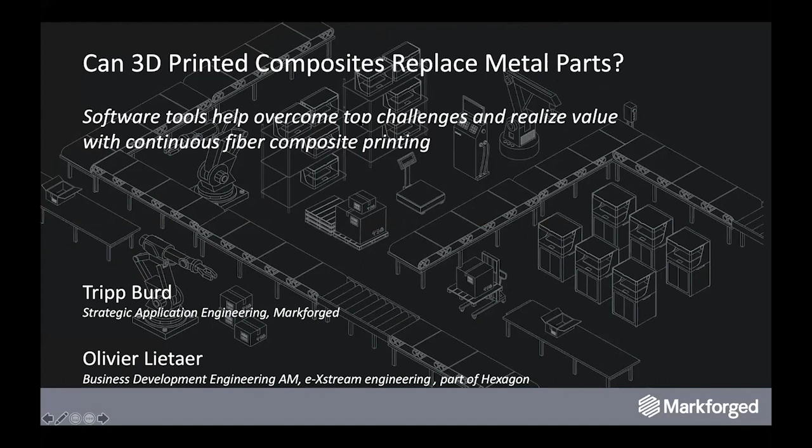All right, thank you. So while we launch into this, a quick background about Markforged. Markforged has been around for half a dozen years and is a growing industry leader in the world of industrial 3D printing. We produce an ecosystem of hardware, software, and materials designed to work seamlessly together to allow engineers to quickly and easily produce functional and accurate parts that can be ready to use straight off the machine.

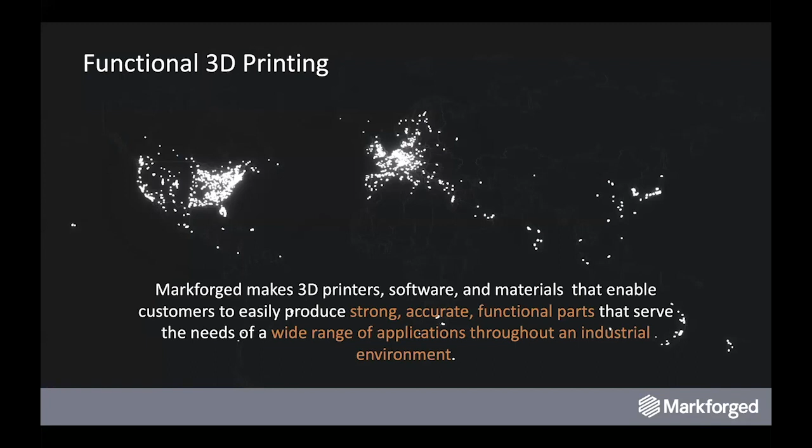Growing globally, we've got tens of thousands of machines scaled around the world, all managed by unique cloud software tools called Eiger that allow for up-to-the-minute connectivity with fleets distributed regionally, enabling virtual inventory management and distributed printing as necessary. Our current portfolio stack looks something like this, with a range of industrial 3D printers differentiated primarily by the ability to 3D print continuous filaments or continuous fibers.

This differs in functionality and performance from most fiber-filled 3D printing materials, where traditionally you have a base plastic mixed with a short length chopped fiber that dramatically increases the strength and dimensional accuracy of a component. However, it's still limited by the short chop length of the fiber.

Markforged pioneered the invention of continuous printing, where a print head extrudes a second material mixed with a complementary binder that allows it to print fully structural, fully strong parts that in many cases can exceed the strength of aluminum due to the properties of continuous strength fiber.

This allows functional parts straight off the machine, coupled with an enterprise software solution that allows for easy management of builds, different reinforcement strategies, as well as print fleet management across the entire ecosystem within your installation, with multiple users collaborating together to provide functional parts around the world.

All this is coupled with a range of engineering materials to provide functional strength. In the composites world, we've got materials for higher strength, flame resistance, and different surface properties, coupled with the ability to print continuous fibers such as Kevlar, fiberglass, or carbon fiber, allowing you to really tailor the performance of a part for a specific application.

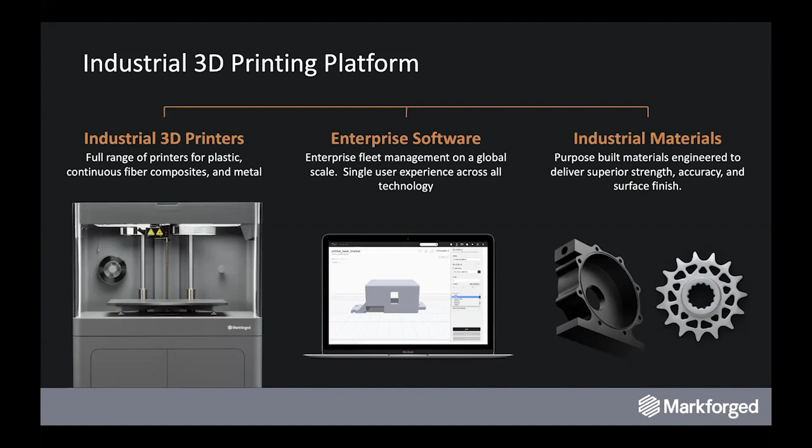In the world of 3D printing, obviously prototyping is extraordinarily popular and extraordinarily high value compared to traditional methods. This is where the fast delivery time and the ability to mock up and iterate development very quickly allows for faster time to market and improved product design and functionality all around.

But if you look at the overall revenue of the Fortune 500 manufacturing companies, the actual spend in the prototyping world is pennies compared to their overall core competency. So the addressable opportunity is a bit limited compared to their core business.

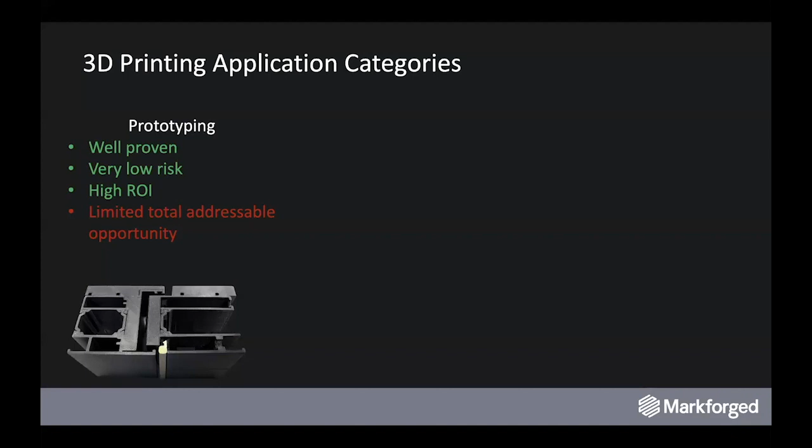Now, growing rapidly in part through the adoption of Markforged tooling, which is becoming extraordinarily popular. This opens up a much wider scope of addressable opportunity compared to the overall bottom line of a business, and still has extraordinarily high ROI due to the low part counts, complexity, and low production volumes necessary for specific part tooling. It does, however, move a little bit more up the risk chain where you've got part-touching details.

You've got things that are impacting the quality of a part that a customer might see. So as far as the de-risking that's necessary to push this into more high-value applications, sometimes other steps are necessary. And finally, the ideal end state is the ability to 3D print end parts.

This unfortunately has seen limited implementation. However, it's growing rapidly. Some of the areas of advancement are focusing on the geometric complexity allowed by additive, or the ability to drastically streamline supply chains by being able to design centrally, send files around the world, and then print locally on demand.

This is greatly reducing carrying costs in warehouses, where one part on the shelf and an infinite number in a virtual library allows for on-demand replacement, but then the ability to restock without having to rely on global shipping times or third-party vendors.

So the ROI here is huge. However, the comparison against traditional methods, the cost per part compared to injection molding or something, is not valid today. However, the other benefits in the worlds of logistics optimization certainly drive more value. The risk here is quite high, though.

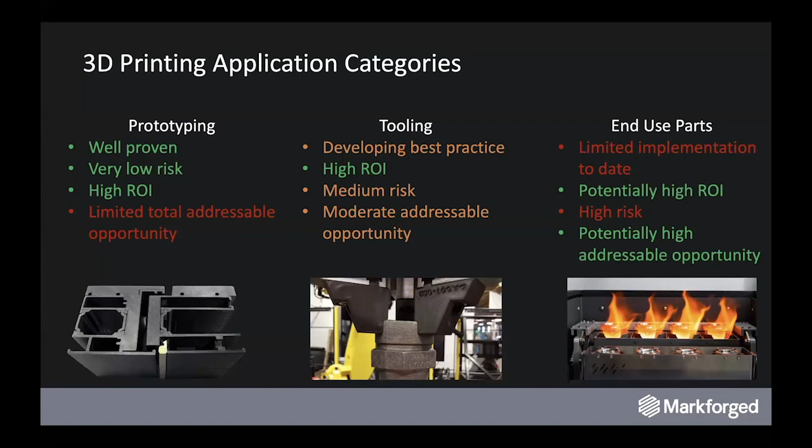So what we want to talk about today is how do we de-risk some of these things that allow the unlocking of more addressable opportunity for these customers.

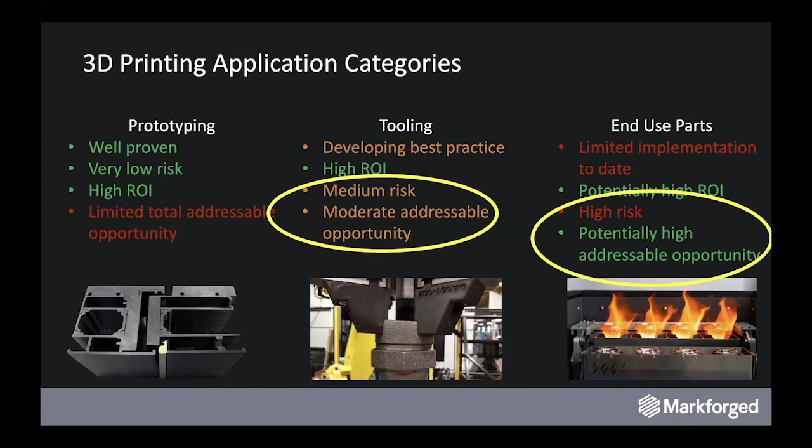So with the complex amount of variables involved in the printing process, we've got fiber choices, we've got laminate schedules, we've got the environment around the printer, material choices for the base plastics, the design. There's a lot of things that are changing. However, ROI, the financial drivers behind making these parts, predictability and repeatability become core as we start to push these functional components into higher-risk areas.

Software is becoming an extraordinarily powerful tool to help manage these variables and begin to predict the performance of these parts before they hit these critical applications.

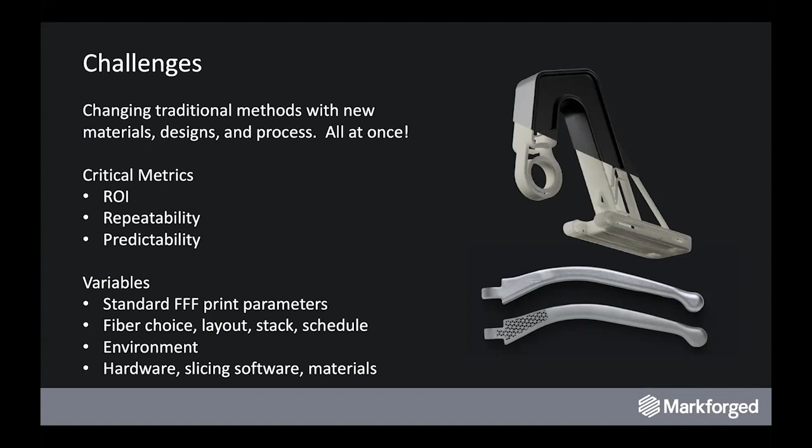So by driving the ability to print carbon fiber in these functional applications, this continues to unlock more value for our customers.

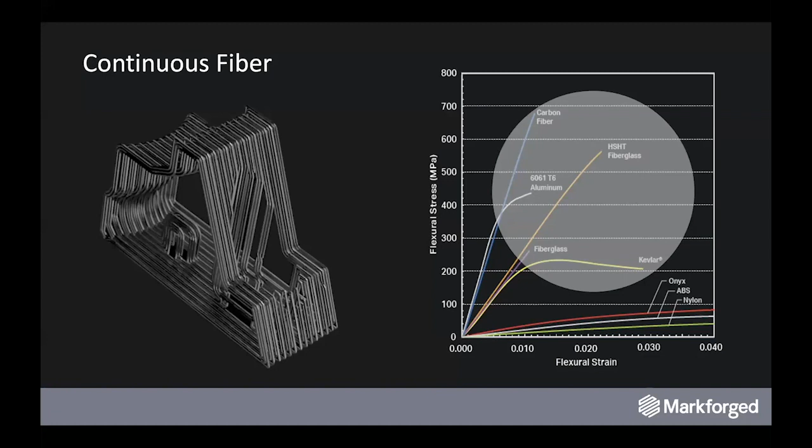Which brings us to Danfoss. So Danfoss is a worldwide industrial manufacturer. They make a wide variety of components for different machine centers and different applications.

However, working with Danfoss Power Solutions in the US, we've developed a great relationship. They're popular Markforged users in the world of tooling and fixturing. However, in their business, they have a high mix of relatively low-volume castings and housings for all of these pumps and things that go throughout their process.

They very much like to use Markforged in all of these areas to improve tooling in their part creation stream. The challenge is that much of this tooling is lift assist. You're lifting these heavy cast metal components and moving them from machine center to machine center for different drilling and milling operations as they go down the line.

These lifting applications are higher value than a standard drilling fixture or nest or something. However, now that we've got lifted metal, worker safety becomes critical.

With their application for 3D printing, they found that it meets the technical requirements and financial metrics for a lot of typical shop floor things. However, the areas where they'd really like to apply this technology are limited by risk. They've been limited in their ability to adopt additive in other areas of their business due to the extensive testing or validation required to print a prototype, destructively test it to ensure it meets load, then roll it out for one production application. When dealing with a very high mix of parts, that becomes costly and drawn out on the timeline, so the benefits of additive are eroded away.

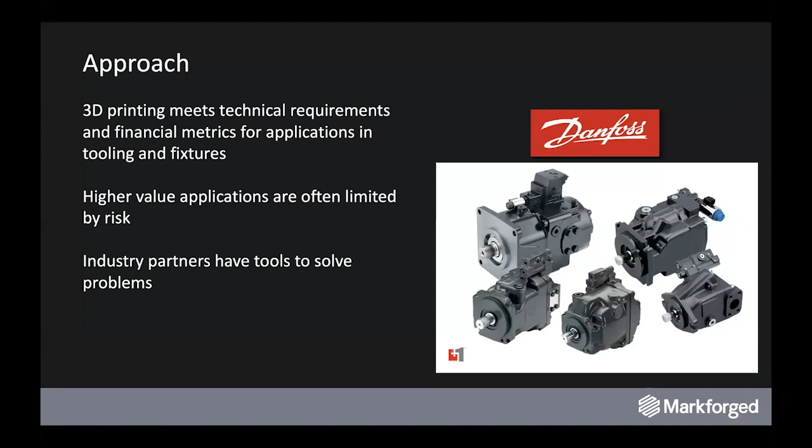This is where Danfoss, being a joint customer of both Markforged and MSC, drove a relationship here, identifying industry partners with the tools necessary to solve this problem. The challenge was to validate, using software tools, the performance of 3D printed composite parts to ensure they could meet the safety and repeatability requirements necessary to replace much of their machined aluminum tooling on the factory floor. By de-risking this application, they were able to apply it in areas that had otherwise been prohibitive. It allows for increased safety, new designs for ergonomics or lighter weight, and still delivers all the benefits additive typically provides, such as time to market, faster iteration, and no external PO process or waiting for external sources.

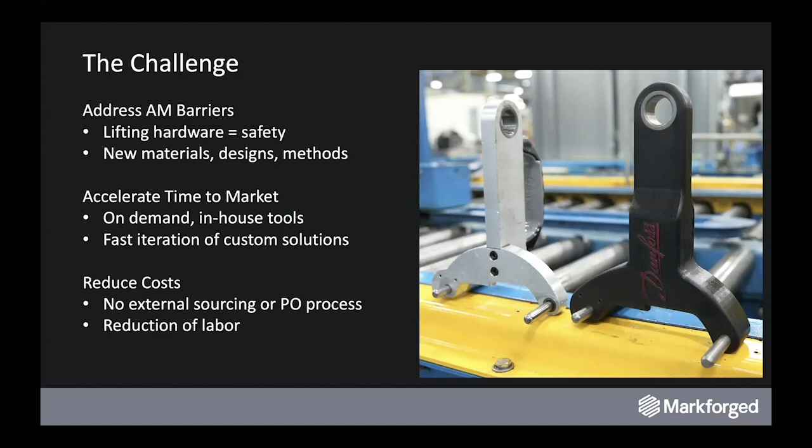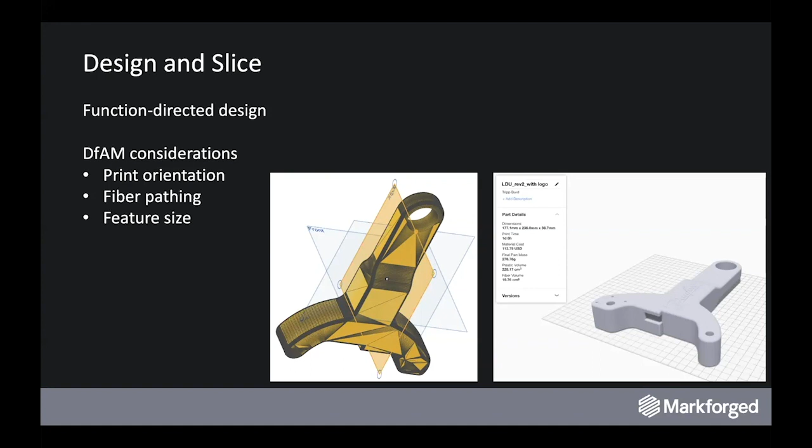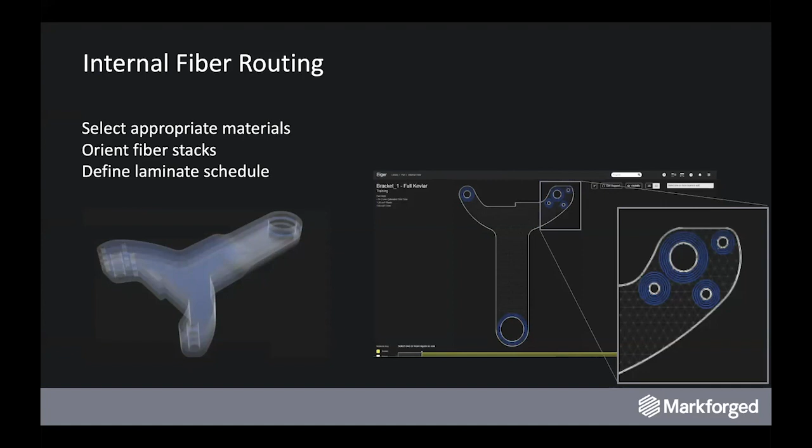Looking internally here, and I'll go through the Eiger view in a second to do it live, you can see that while you've sliced your part for 3D printing in Markforged, you then have the ability to go in and reinforce internal features with particular laminates to strengthen certain areas or provide robustness for different loading conditions. So we'll go in and show how this works. Give me a minute.

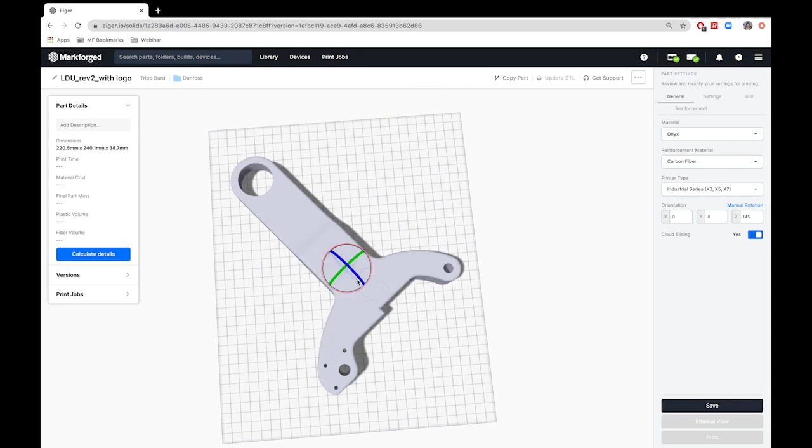Eiger is our software, typically cloud-based. Most of our users are comfortable with that, now being ISO 27001 certified. Our customer IP is extraordinarily important to us, along with their security with their existing libraries.

So this is the workflow in Eiger. The part is imported, and you have the ability to orient it as necessary. It'll snap to certain features to present the best way to print.

In here with our printers, you have the ability to select not only the base material, so I can choose anything in the Markforged ecosystem. So Onyx, which is our short chopped fiber reinforced modified nylon 6, or I can choose any other material in the Markforged ecosystem, Onyx FR if this is a flame resistant application, or even the tool steels if you wanted to transition this to the Metal X rather than the industrial series. Then on the fiber side, the ability to print Kevlar, carbon fiber, high temp, high strength fiberglass, all of these things that can be chosen for different properties desired of the part.

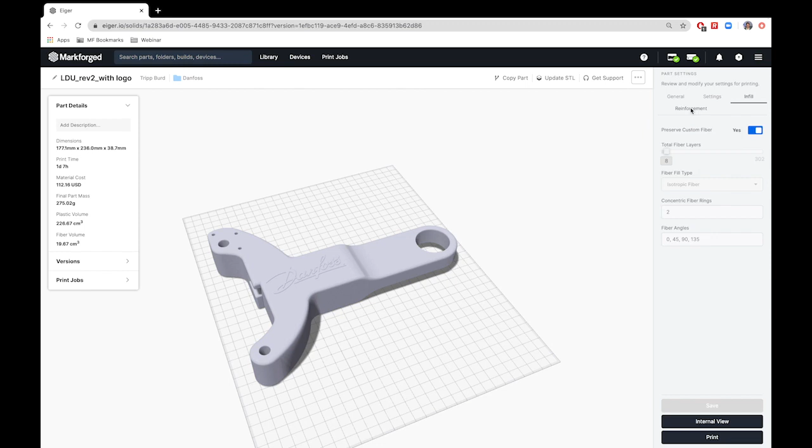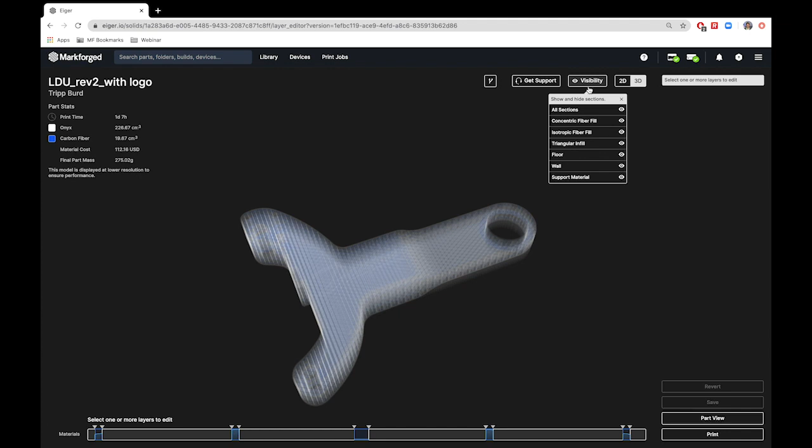Once the global settings are determined, the ability to go in and do the actual composites engineering is possible. In the internal view, you can get a 3D fly-through version of the internals of the part. So rendered here, you can see we've got 5 laminate schedules, or laminate stacks of fiber, where we're reinforcing the outer planes. We're running concentric fiber between the load-bearing top ring and the pins at the bottom of the component that actually nest against the metal casting.

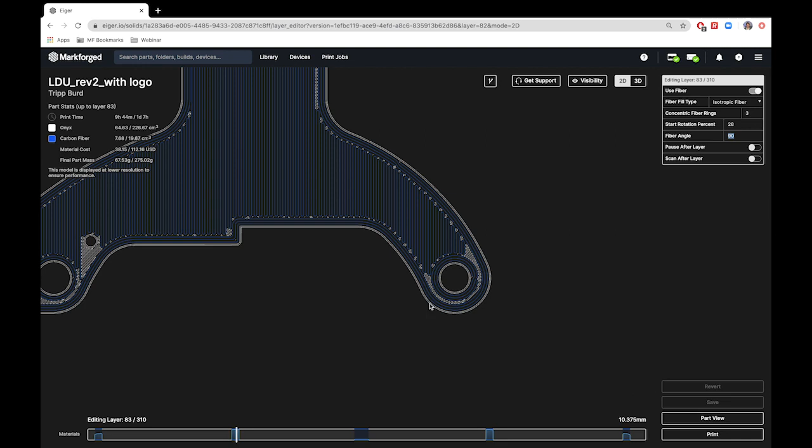Going in layer by layer, you can actually engineer the performance of your part to produce certain properties. In this case, we have concentric fiber routing around the lifting ring and running all the way down the pins that connect the load to the bottom piece, allowing for any sort of laminate schedule you need.

You can go in and change fiber orientation, fiber rotation, things like that that are necessary to improve properties in certain bias—so a 90-degree fiber, and then an isotropic laminate stack that helps give strength in all dimensions.

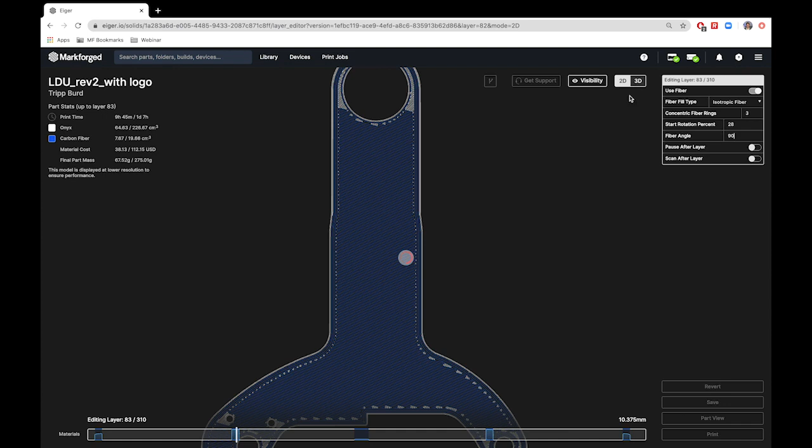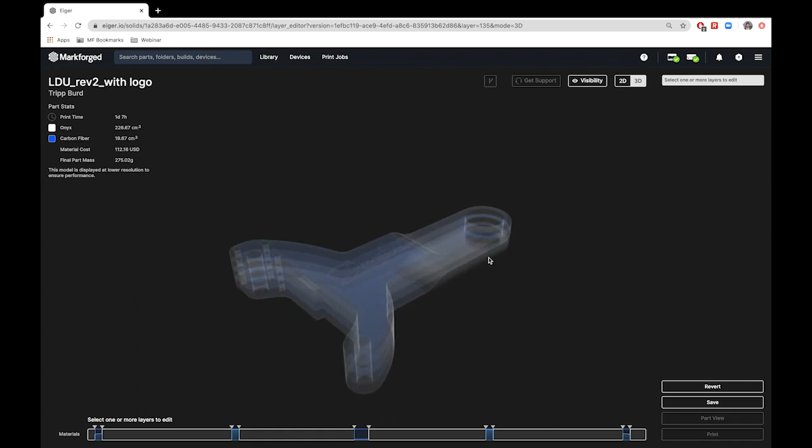Then down here, the ability to reinforce through holes for strength, preventing any kind of point load through the walls of the part. For areas that don't require reinforcement, you can run just our base plastics material in a honeycomb—very lightweight—while still placing fibers at the outer extent of the part to get the section modulus as high as needed to prevent deflection in other directions.

So extraordinarily powerful here. Once engineered, this is where the new functionality comes in: the ability to export this geometry into a format that can be digested by simulation software.

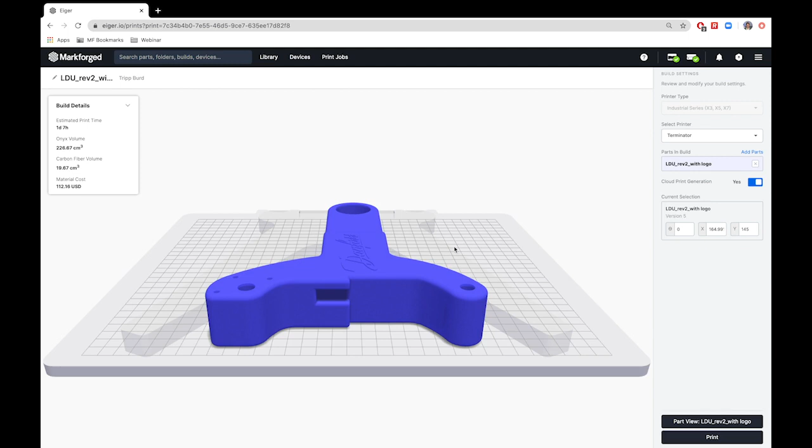It's much different than just exporting the geometry of the part showing walls and infill, because we also need to understand the vectors of this fiber position—not only where the fiber is, but which direction it's pointing, layer by layer throughout the whole part. Exporting that into a format that can be ingested by our software tools is really where the innovation is on this platform.

So from here, I'll allow Olivier to show the next steps once a sliced and reinforced file is sent out for export.

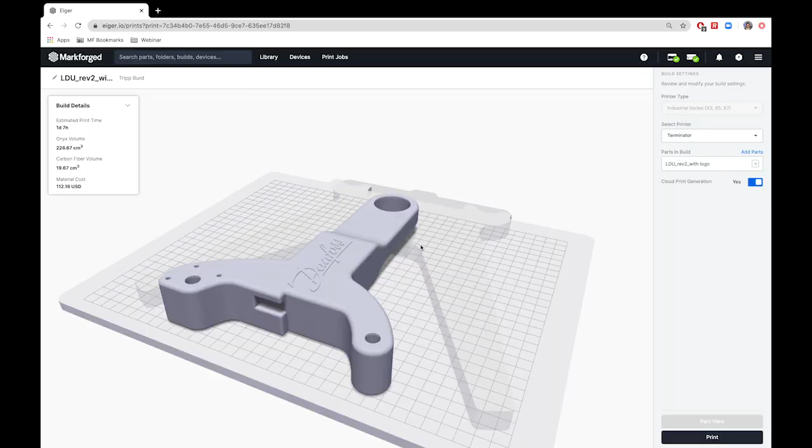So who we are: e-Xstream is essentially a team of passionate material and process experts. We're a small company, around 80 people, essentially PhDs and material engineers, created about 17 years ago. We have two main headquarters located in Brussels and Luxembourg, but offices in many places, including the US.

At e-Xstream, we developed two different softwares. The first is the material and process modeling platform called Digimat, more specifically dedicated to composite materials, so any multi-phase material. The second software is Material Center, a material lifecycle management platform that allows you to store and track any material data in a unique centralized platform.

That's specifically very powerful for additive manufacturing, where you could store any kind of data related to your printing—from the printer serial number, the material batch you've been using, the build with how many parts you've printed, up to the test data performed on the same build.

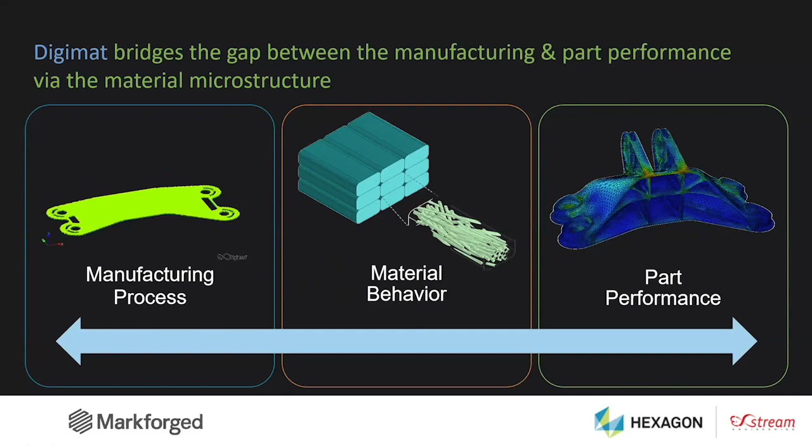The solution we propose for additive manufacturing in partnership with Markforged is based on three key building blocks: material engineering, process simulation, and part performance. It can be extended with Hexagon and MSC products for topology optimization and part inspection.

During this webinar, we will essentially focus on the material engineering and the part performance side.

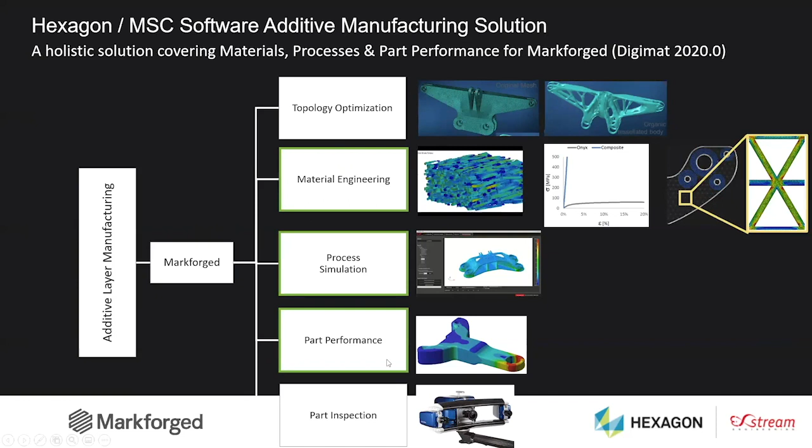In order to perform structural analysis of Markforged designs, there are two key ingredients we add to a finite element model. First, we are finalizing an interface between Eiger and Digimat that allows us access to the filament and fiber pathing. Second, we calibrated a Digimat material model based on experimental testing, and the combination of the manufacturing data and this toolpath-dependent material model allows us to predict the as-manufactured part performance.

Of course, the very first step is to create a finite element model. You need to mesh your design and apply the boundary conditions and loading that reproduce the in-service conditions. The good news is that we are interfaced with most FEA software on the market: MSC Nastran or Marc, but also Abaqus, LS-DYNA, ANSYS, or SAMCEF.

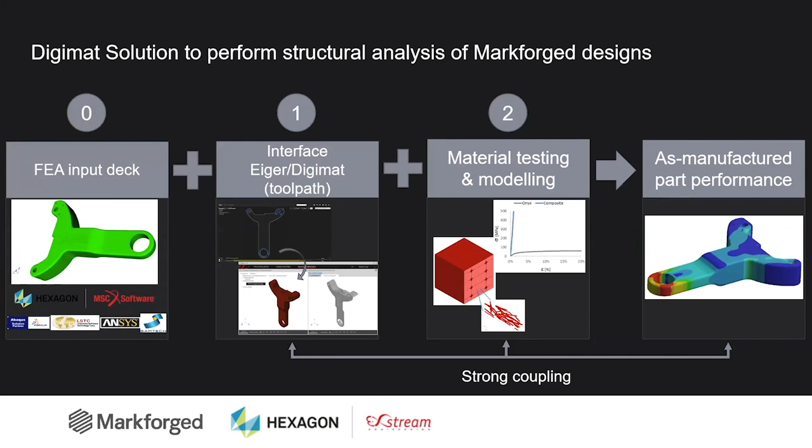These are really the key steps we propose to validate and optimize the design performance of Markforged printed parts. Now we will go deeper into the details of each of these different steps.

The first step is about the toolpath. Thanks to our partnership with Markforged, you will be able to export the toolpath from Eiger, import it in Digimat, load it, and map the filament material - whether it's Onyx or a composite material - and its orientation onto the structural mesh.

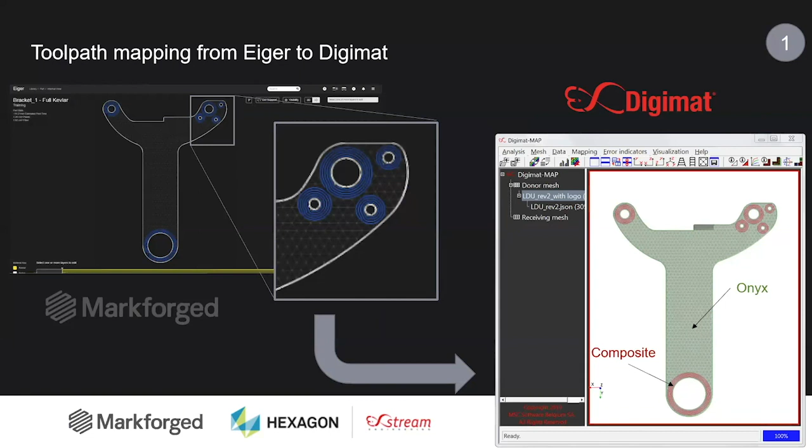For that, we have a specific workflow that allows us, from a given toolpath, to map this information onto the structural mesh. So somehow the simulation needs to be aware of the toolpath and toolpath orientation.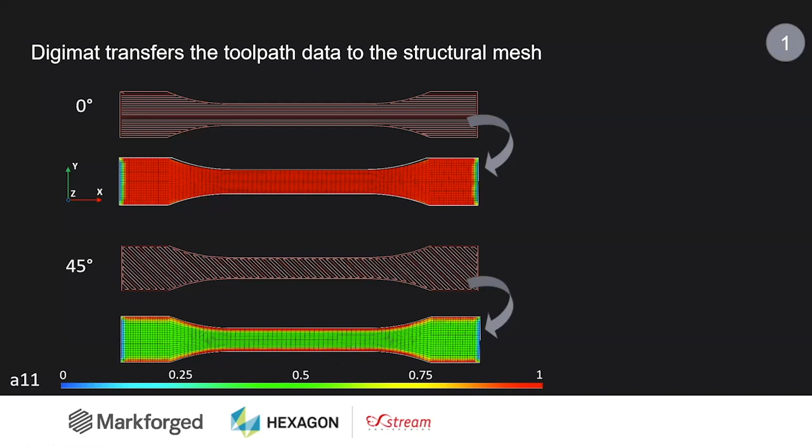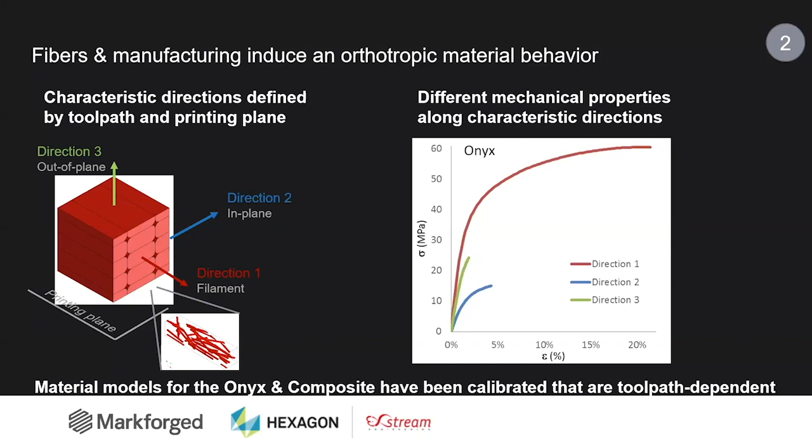When we started investigating the Danfoss tooling design, we had the pleasure to find an additional challenge, as explained by Tripp: the relatively systematic use of triangular infill. While it makes perfect sense to gain material, weight and printing time, it is an important aspect that needs to be integrated into the simulation workflow, because it will affect the material behavior and the part performance in the end.

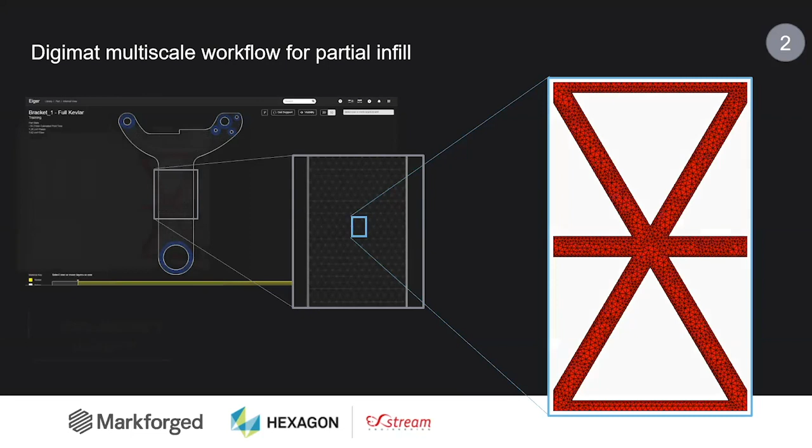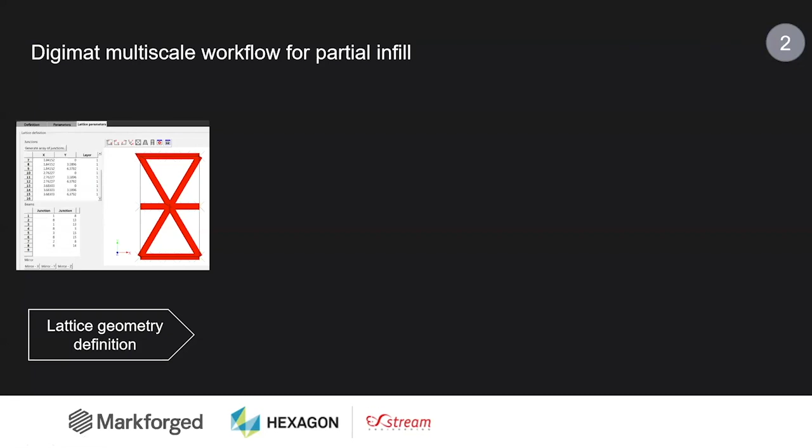To this end, we are using Digimat FE, one of our different tools, to create first the unit cell of the infill. This is the symmetric unit cell of the triangular infill that we reproduce here, just by defining an array of different nodes and clicking to create the associated junctions, the different struts. Once that geometry, which can be any kind of geometry, is reproduced in Digimat, it will almost automatically mesh the geometry and assign the right material behavior, so onyx here, the boundary conditions and the loadings.

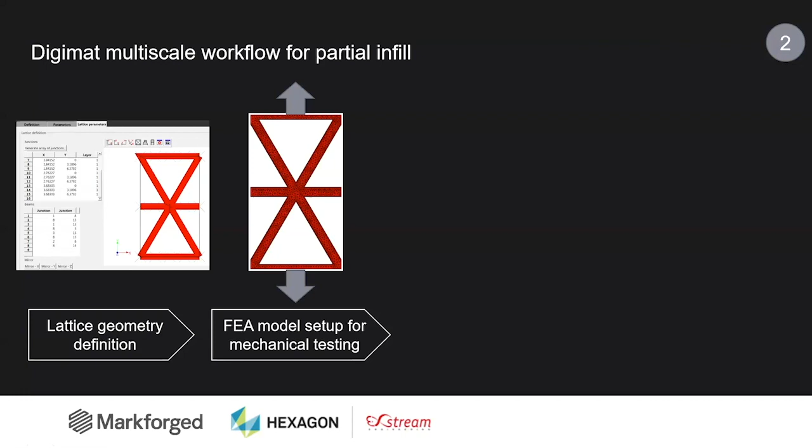We can run that analysis, post-process the different results, and export the equivalent material behavior to the finite element analysis, so that we don't have to mesh very finely this kind of infill at the level of the part. In other words, we have developed and applied a multi-scale workflow that allows us to take into consideration the as-printed material microstructure at the finite element analysis level.

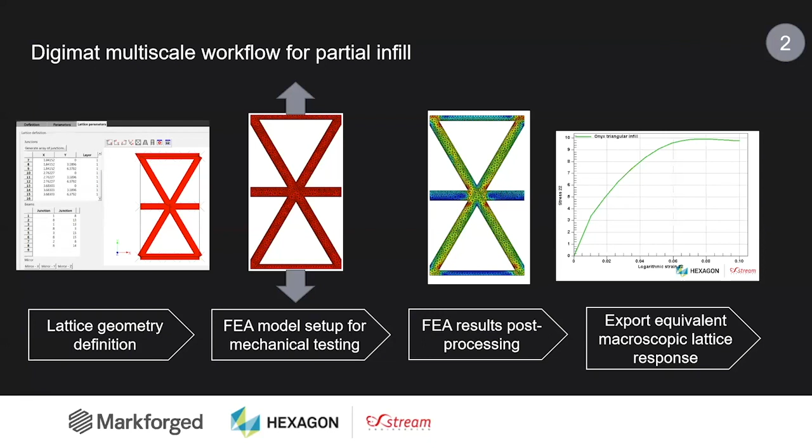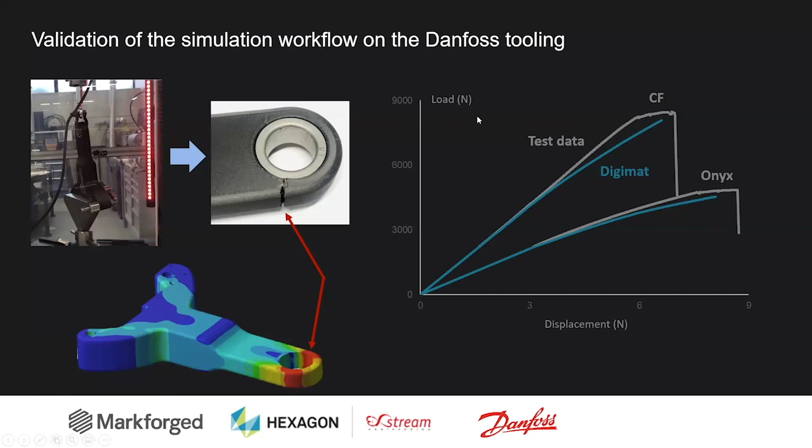As you can see, the right failure location was found by the simulation, matching the experimental results. We also have very good agreement between the test data in gray and the Digimat results in blue for the onyx and for the composite material. Adding only a couple of additional layers of composite was able to almost double the stiffness of the material, and in total, the part was able to sustain more than 7,000 Newton.

To summarize the solution that Digimat offers for Markforged designs: we need to access the toolpath data from Eiger, and that is thanks to our partnership with Markforged, which gives us the connection to feed critical process information from Eiger to Digimat. We also need access to validated material models, and since our previous release we already had calibrated the onyx and continuous carbon fiber models.

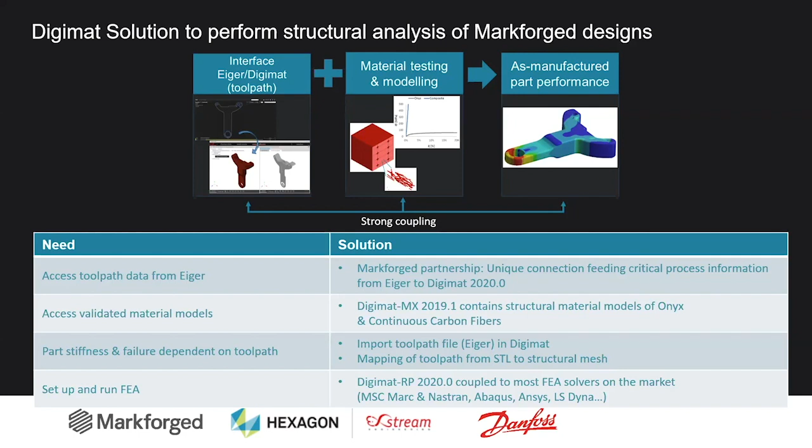We need the part stiffness and failure to be dependent on the toolpath. For that, as seen in the workflow, we need to import the toolpath file into Digimat, then map the toolpath from the STL to the structural mesh, which will be illustrated during the live demo afterwards. Finally, we need to set up and run the finite element analysis, and for that Digimat RP is coupled to most FEA solvers on the market, again MSC Marc, Nastran, but also Abaqus, ANSYS, or LS-DYNA.

So it's time for the demo. I will switch to the Digimat platform, and you can see here that we have different tools and solutions. The one I will be selecting here is Digimat RP.

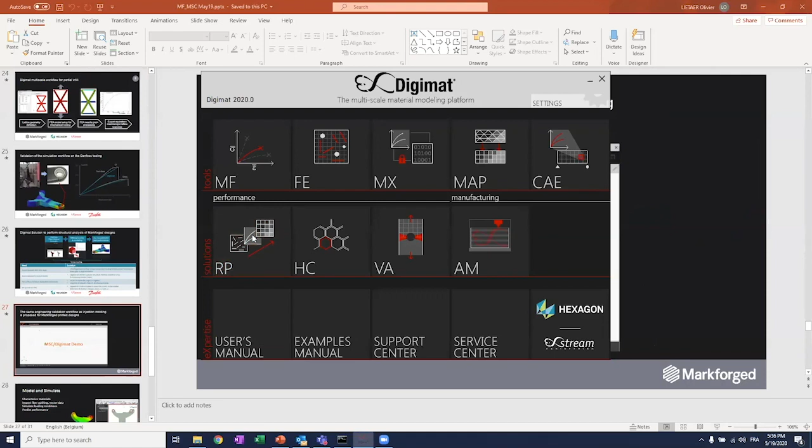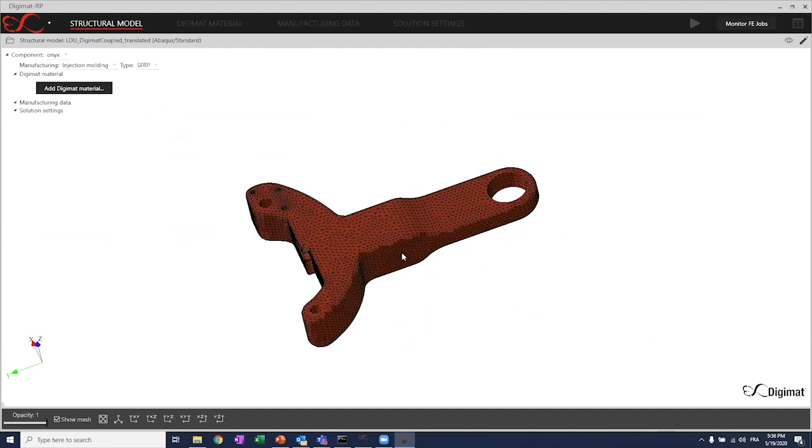Keep in mind that Digimat RP is not a finite element solver, meaning that the very first step is that we consider you have already introduced your input deck. So you already have a mesh existing on the part that can be seen here, and you already have the boundary conditions and the loading assigned and so on. From here, we will essentially add the two ingredients I mentioned before: the Digimat material model and the toolpath data. Let's start with the tooling from Danfoss here as a first example.

And we will first see a workflow where we only use the onyx, and then I will illustrate another workflow with composite material as well.

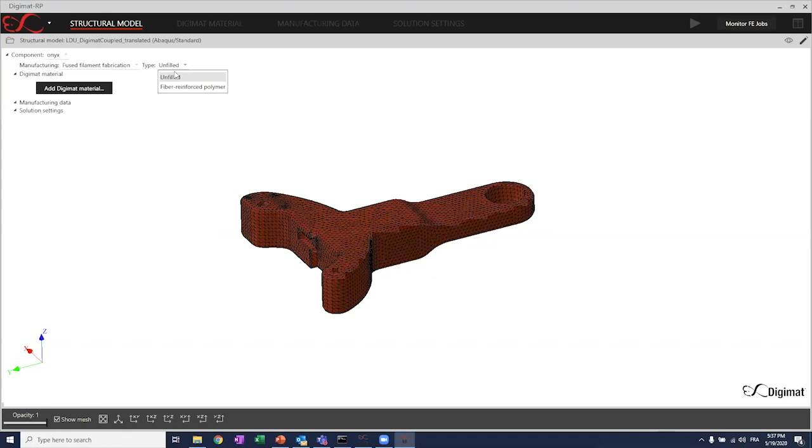So the very first step here is to select what manufacturing process we are interested in. In this case, it will be fused filament fabrication for the onyx material. I will select a fiber reinforced polymer as the onyx is carbon filled.

And then I can select the file to be loaded. So here I'm adding the Digimat material model to the Digimat RP interface. Once this is done, I will define the different manufacturing data.

So here I have the choice between selecting a file that has already been mapped, or doing the mapping within Digimat RP. For the sake of the demonstration, this is what I will do.

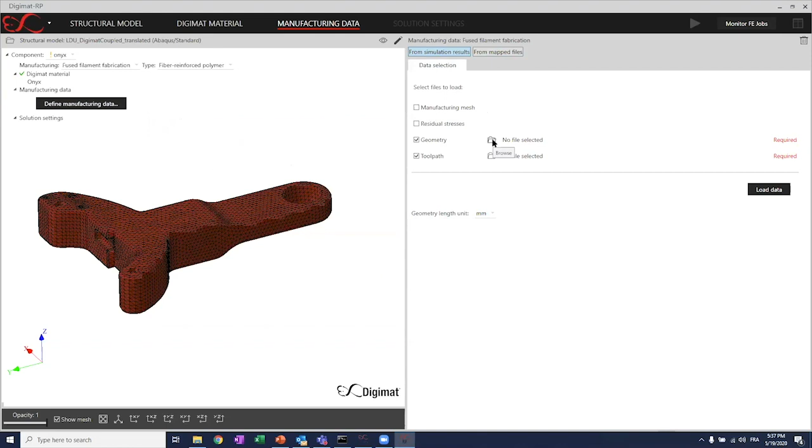So here we need to select two different files. First, the STL file, which is nothing more than a surface mesh. And the second is the file coming from Eiger, the toolpath data. I will load those data here in the interface.

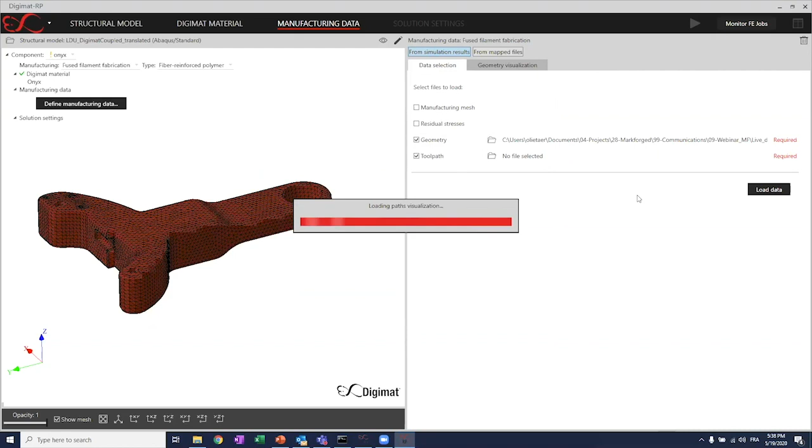Once this is done, I will be able to review the toolpath, just to make sure that I selected the right one, so that it can be illustrated here.

If I zoom in, you will see first a couple of dense layers of onyx, and then very quickly the famous triangular infill here. And of course, I can move on progressively.

So at this stage, I have two different meshes. On the left, you have the structural mesh, and on the right, you have the manufacturing mesh, the STL file.

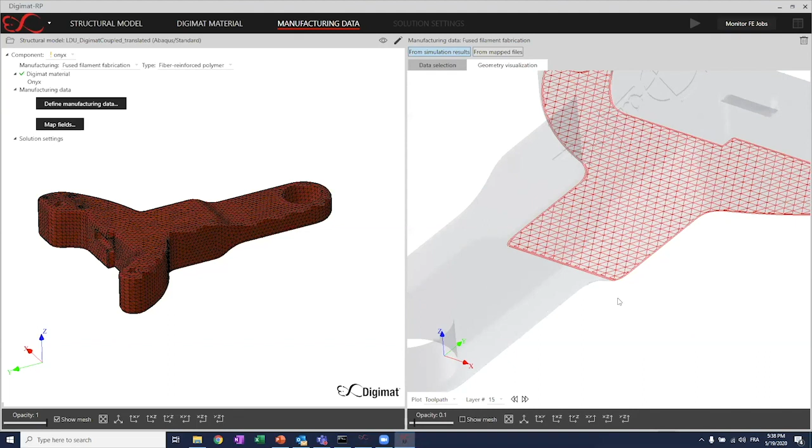And of course, we need to do that transfer, that mapping of the toolpath into the structural mesh. So this is what we do here.

It will open a new window where we will see first if the two meshes are superimposed or not. In this case, they are superimposed.

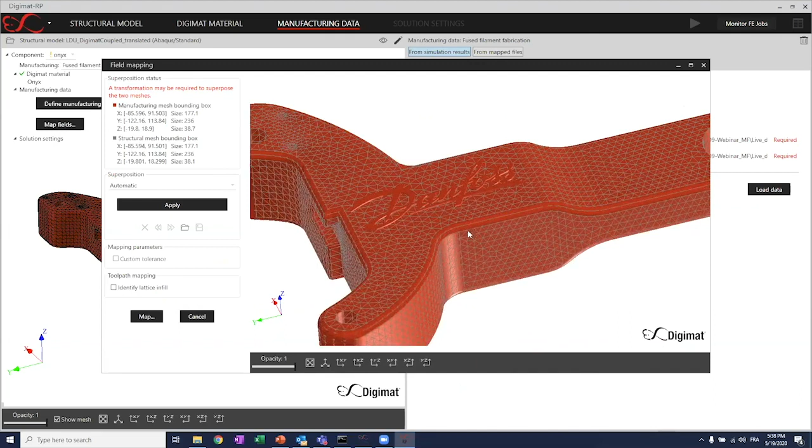You can see in red the STL file with the Danfoss logo, and here in gray you have the finite element mesh that is described. So they are perfectly aligned, meaning that I don't need to do any additional step of superimposition, and so I can basically start the mapping procedure.

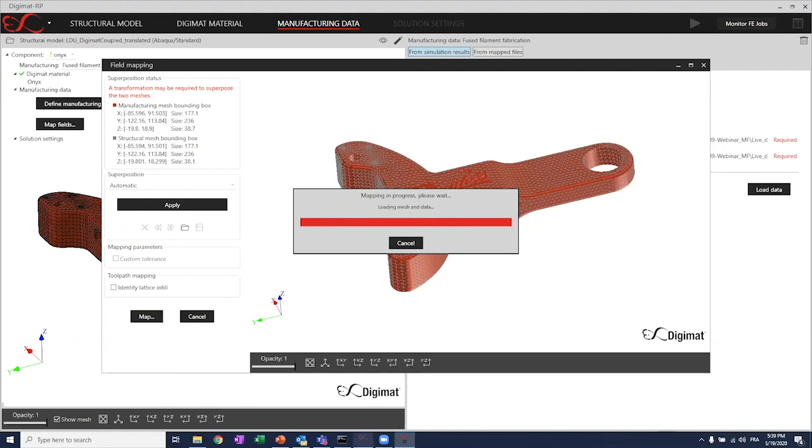So that will take 1 or 2 minutes. While this is running, I will initiate the other workflow on the dumbbell, where we'll also associate continuous fibers.

So we start our same workflow, meaning that I will load my input deck. This is an input deck with MSC Marc in this case.

Again, you can see the mesh that is displayed here. We have fixed one of the extremities, and the displacement is applied on the other extremity.

So very basic. Now, the difference with the previous one is that we have predefined element sets that will allow us to assign the right material on the right elements. So here we'll see, in this case, the onyx, which is essentially the outer shell of the dumbbell.

And then in the core, if I pass my mouse on the carbon fibers element set, you will see that all the core is made of carbon fibers. That's just a choice of my own, just for the purpose of the demo here.

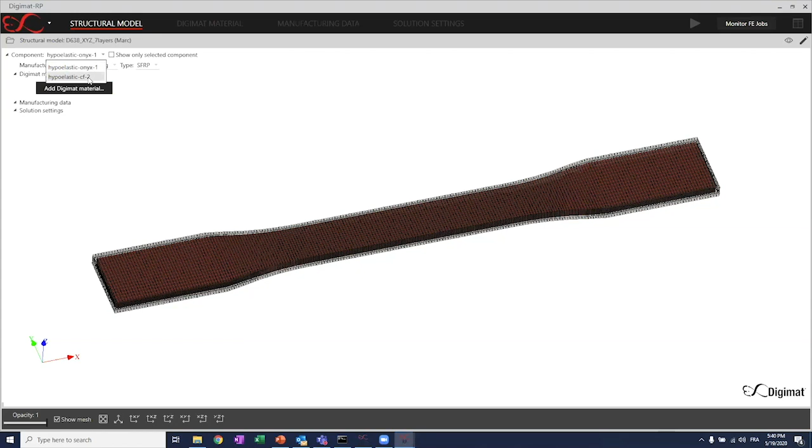And I will need to assign the material and the manufacturing data to both those element sets. So let's start with the onyx again.

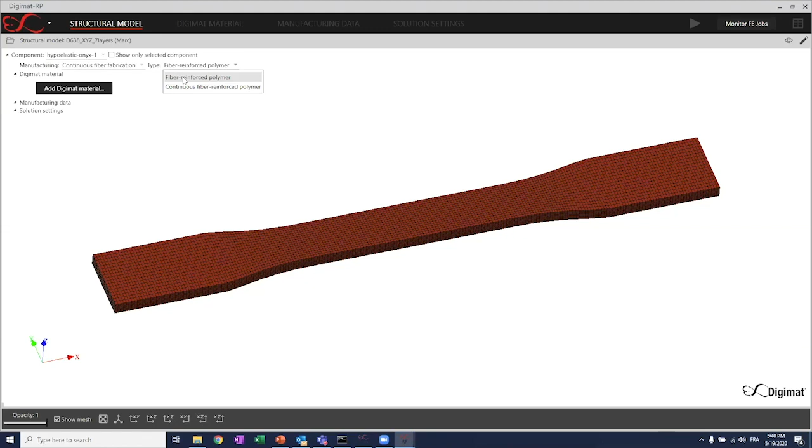So this time I will select continuous fiber fabrication because we have composites in the design. First with the onyx, so this is with the short fiber reinforcement. I will again load the onyx material card.

And then I will load the manufacturing data, and in this case, it's the already mapped data that I will integrate. So I can load this and see that here, essentially, I've been using a unidirectional toolpath, which is why we have one value almost everywhere on the design.

Then I can review the different settings, potentially change some of them, before I see that I have the green check here, meaning that for the onyx, we are ready to go.

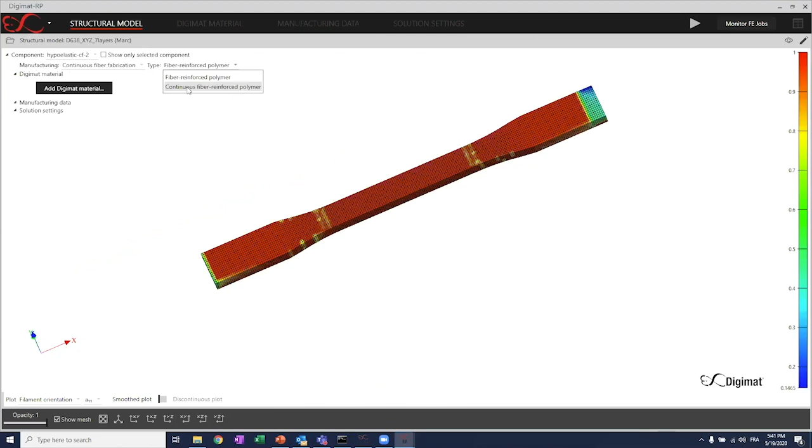Now I need to do the same for the carbon fibers. That means I need again to select continuous fiber fabrication, and this time select the continuous fiber reinforced polymer, choosing the composite grade, so the associated material model.

And again define the same material data that will define the material and its orientation everywhere in the part.

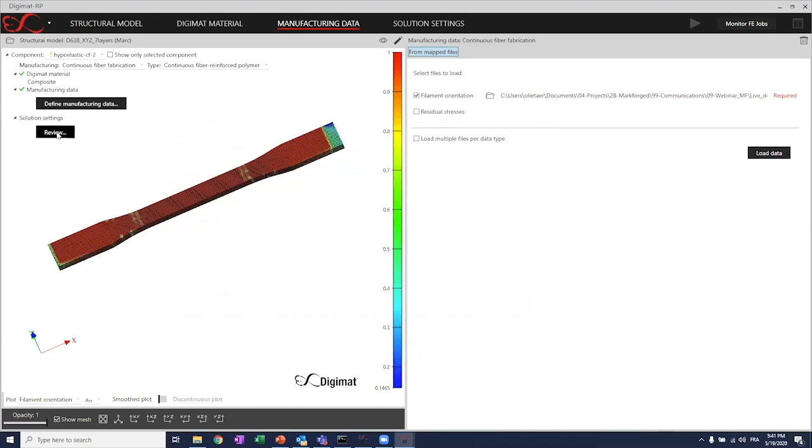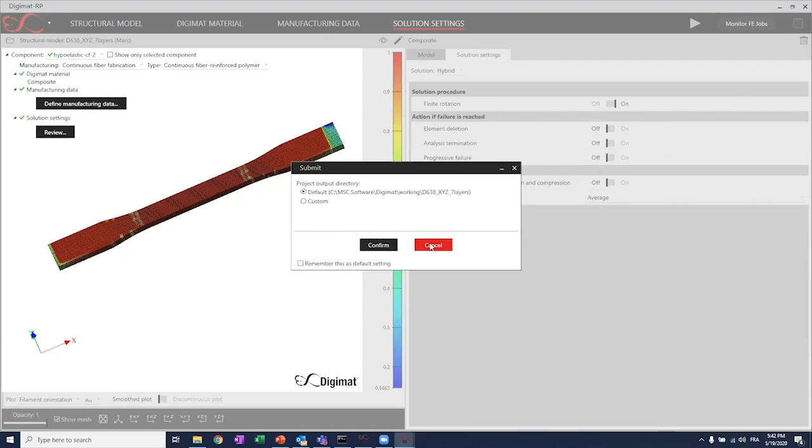If I click on review, I can define some of the changes related to failure and other kinds of damage parameters. But basically at this stage, I have the green check everywhere, so I can just click submit the job and start the analysis. This will launch a coupled simulation between Digimat and the finite element host that will run in the background. Once the simulation is over, I will be able to post-process the results in the finite element host.

Going back to the mapping procedure, you can see that the mapping is over now. Similarly to the dumbbell examples I shared, if I select the A22 component, I will see to what extent the filaments are aligned with the Y direction. On the contour, we are perfectly aligned, orthogonal in this area, and here we have very likely a 45-degree infill, so we see the green value of 0.5.

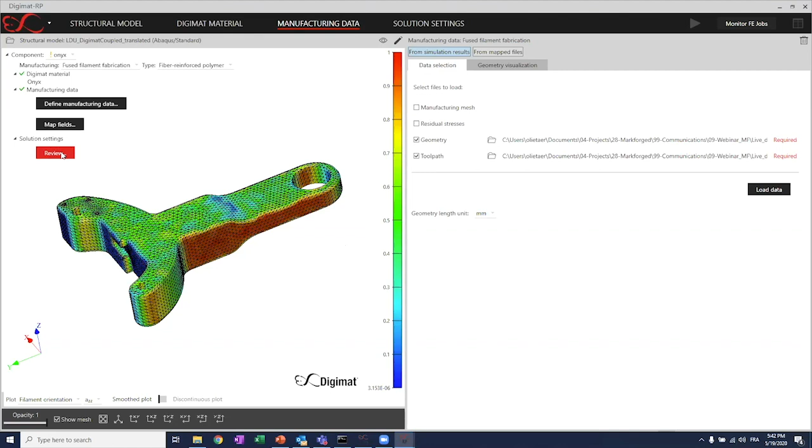Once it is done, again for this onyx design, I can just review the different settings and run the simulation.

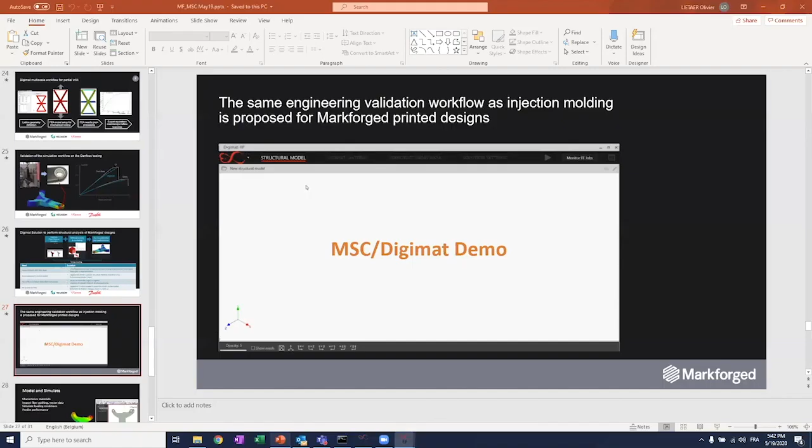So that's it for the different simulation workflow. I will go back to my presentation.

In summary, what has been performed here with Markforged is first that we have characterized the onyx and carbon fiber materials. We have a capability to import the fiber pathing, first exported from Eiger, defined under the form of vector data. We need to simulate the different in-service loading conditions with the help of the finite element model, and then we can predict the performance by adding the toolpath data.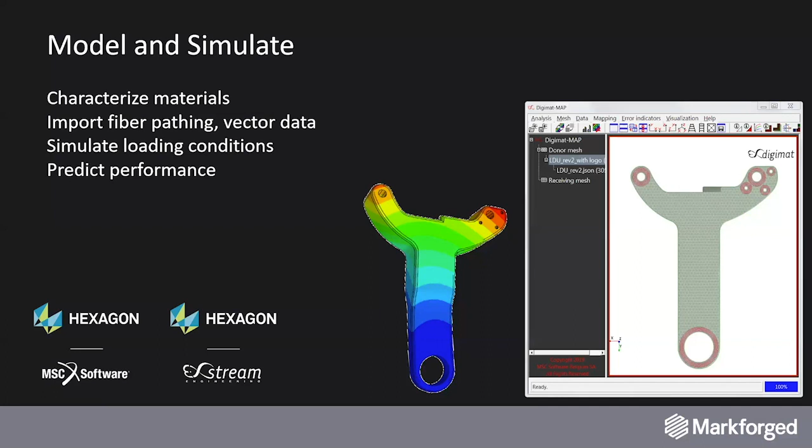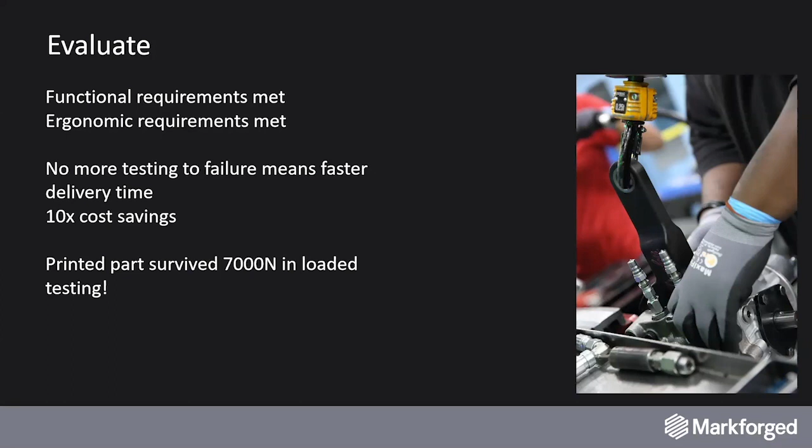That was how we were able to evaluate the Danfoss design. We can see that in the case of Danfoss, we have met the different functional requirements and the different ergonomic requirements, thanks to additive manufacturing and the Markforged technology. If we can get rid of any testing to failure, it means we can have a faster time to delivery, and we can also expect cost savings up to 10 times. We have shown here that the printed part was able to survive 7,000 Newtons in the loaded testing.

That's great, but if that work was specific to Danfoss, it will not really help the industry. So what we are proposing, thanks to our partnership and the Digimat platform, is that you will have access to the same material models. Those material models are embedded in the Digimat MX database for onyx and for composite, at the moment for carbon fibers only. You will also have the ability to export the toolpath data from Eiger so you can perform your own simulations to validate, optimize, and compare the different toolpath strategies you want to investigate.

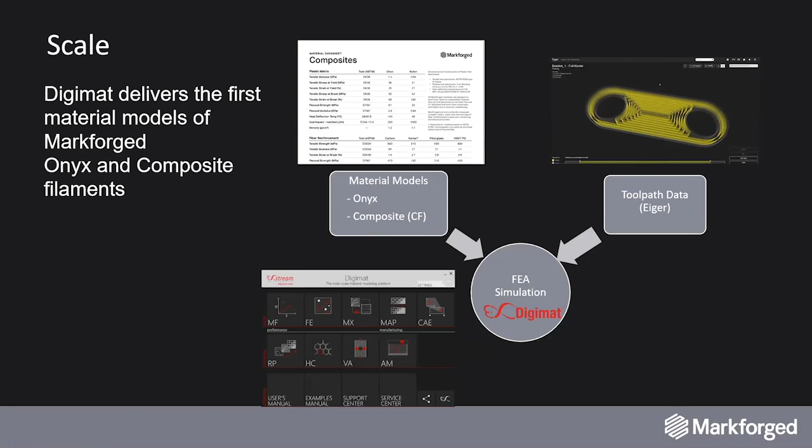I guess with that, we completed the presentation part of this webinar, and it's now time for questions.

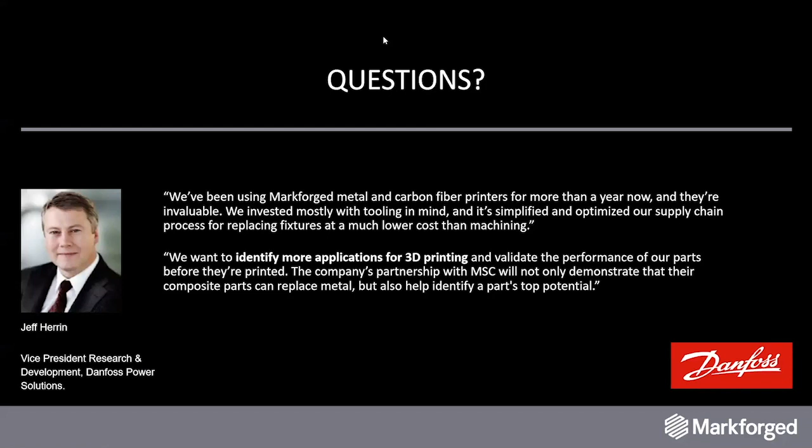So the question is, what sort of data file is necessary to analyze the geometry and strength? STL, IGES, etc. In this case, the STL of the geometry to be analyzed is necessary to import into Eiger for slicing, but also to import into the Digimat platform for meshing and overlay. Then the material card would be required—this is the properties for the carbon fiber as well as the onyx. This exists in the Digimat material library right now and can also be found in our material spec sheets.

So those combined give you the raw inputs. Then the vector file showing material position and orientation within your part is the third component that's necessary. That's an export from Eiger in a JSON file format, showing position and orientation. It differs slightly from the Markforged MFP file, which is our build file used to send builds to the printer. The build file captures the movement of the head to put the fiber where it needs to go, and the JSON file records where the fiber actually ends up. Part of the Markforged secret sauce is how we move the print head to get material where it needs to go—that's not the same as where the material ends up. So the two different file formats are necessary for the different properties required.